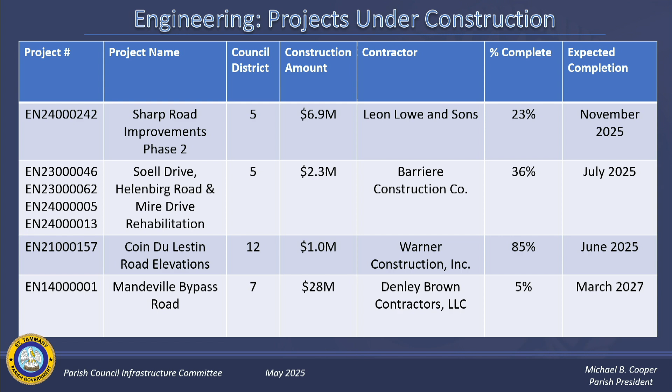The big one on the list, Mandeville Bypass Road - it's a $28 million construction project. They're making their way, clearing through it. As with any project, you hit a little hiccup here and there, sometimes they're a big deal, sometimes they're not. Clearing operations showed some unsuitable soil materials on the front portion of it. It's a small issue for the scale of the project - we're working through it. We also have the connection at US 190 that we're navigating a few things with DOTD on for construction traffic. Again, for the grand scheme of the project, that's small potatoes. If that's the only problems we have to deal with, I'm tickled.

Square 154 drainage - that's on Caroline, Carroll, and Lafitte Streets, in Councilwoman O'Brien's district. Creek construction - this is closing in some ditches along the street and reworking the drainage in this older neighborhood to improve drainage flow. It's 75% complete, and we're expecting that to be wrapped up next month.

The next project is a rehabilitation project for Berry Todd Road and Dixie Ranch Road in Lacombe. Just so you note, it shows 0% complete. Technically this project is under contract - the contract's been let, contracts have been executed, and we're waiting to issue a notice to proceed on it. So it's in that in-between land right now, but as soon as I have a notice to proceed date, everyone will be aware.

Same with Pinnacle Parkway rehabilitation in Councilman Smith's district. I'm glad we're doing this after Costco came in, not before - it's the right time. The pavement's in pretty poor condition in certain locations, and this is going to be rehabbing the entire length of Pinnacle Parkway. If you look when you get off the interstate exit at that location, the asphalt shifts colors - where it shifts colors is the differentiation between state, as part of the interchange, and then us. So that's the best way to determine your eastern extent to it. If you're riding down that road, pay attention, watch when the asphalt changes colors - that's where we're starting, and again this is due to pavement condition out there.

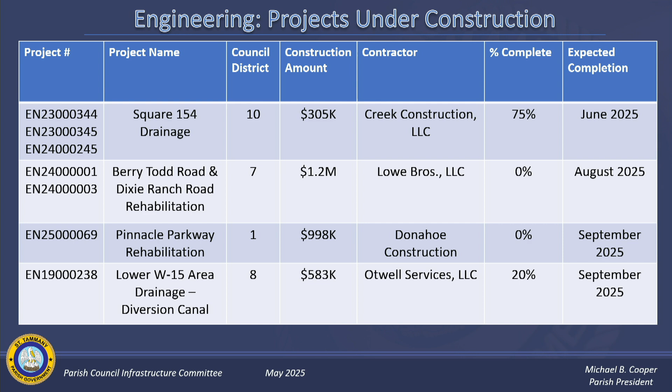Yep, September. And then, me and Engineering and Public Works combined our presentation, so I'm going to turn it over to Jay real quick to go through Public Works projects.

On the Sharp Road, it says 6.9. Is that for phases 1, 2, and 3? No, that's just for phase 2. Okay, thank you. I believe the first phase was at 1.6 million. No, I'm fine, I was just curious what that number was.

Thank you, Daniel. I think the way Daniel has this, we've got projects under construction, so we'll move into Public Works projects under construction, then I'll turn it back over to Daniel, and he'll talk about things that are upcoming, and we've also got some Public Works projects that are upcoming as well.

First on the slideshow list, we have District 7, 9, 12, and 13. I believe we handed out this packet as well for y'all to follow along with. It's got a little bit more additional information, listing the different roads we have in the package and which district those roads are in. The 7, 9, 12, and 13 package was the first asphalt package of the year to go out to bid, and it's about 50% complete right now.

Something to note that we didn't include here, but we can in the future, is that all of our projects have come in under budget right now. If they weren't under budget, we'd be coming back asking for a budget amendment. Back after COVID, that happened to us multiple times with all the price increases. But lately, we've been getting really good prices on a lot of the projects we put out to bid, so we've been under budget, and so far we're on time with all of our projects.

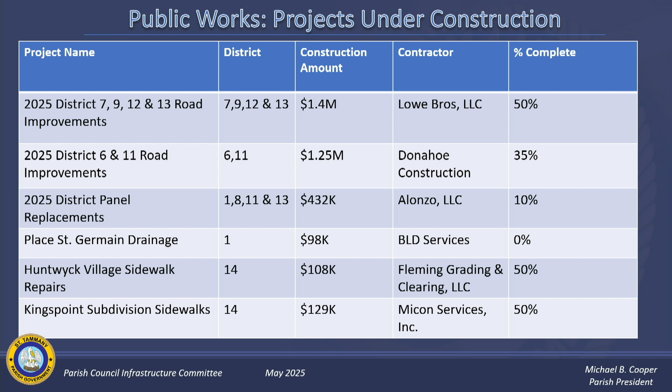Following that, we've got the turning radius improvements in Districts 8, 10, and 14. We're about 20% of the way through. We've been having really good success with turning radius projects in the various districts. We've got a lot of narrow roads that intersect either into collector roads or state highways. Maureen, in your district, we've done a handful going down Highway 59, and in Arthur's district and Joe's we've done some as well. So they've been very well received.

Did you have a question, Councilman Corbin? Yeah, I was just going to ask, for the turning radius project, there's typically an open ditch since we have a lot of those. So you'd extend the culvert and put a softer curve to transition from one road to the next? You have to first extend the culvert, then build something up on top of it, and then put roadway material on it. That's typically correct. If we need a catch basin or an extension of the culvert in order to increase the radius on either side of the side street, it gives more room for vehicles to make that maneuver.

Okay, thank you. And is that, I'm sorry, are those turning radii, the ones that you're building in the future, are those what's incorporated in our UDC today?

I would have to get with Ross and Daniel. I'm not sure if you know - would you mind taking an action to follow up with Ross? Let's make sure that if you're learning things as part of turning radii, that we don't continue to design things the same way. Yep, all right, thank you.

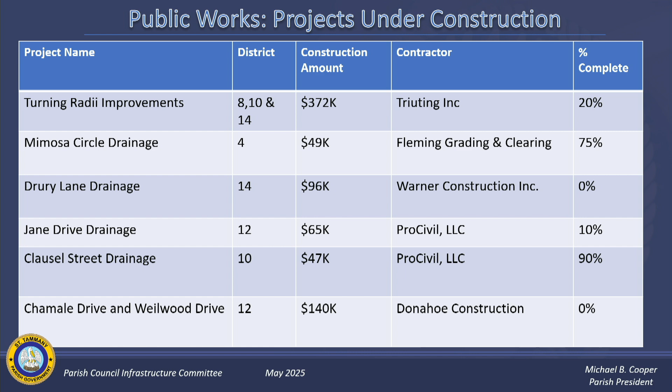And back over to Daniel. All right, so this is what I always look forward to - the projects that are coming up next.

First, we have Harrison Avenue rehabilitation. Anybody that's driven down Harrison Avenue knows it's in need of rehabilitation. Yes, very much so - the drought did us a number. What was that, two years ago, drying out the ditches along the side of the road, settling out the road really well, making a nice crack down the entire length of it with settlement. But this is a big one - I'd consider this phase one only. This is from Abita Ridge subdivision to Highway 59. The first leg from Abita Ridge to US 190 is running as a separate project that includes widening, some turning improvements, and intersection improvements at Falconer Boulevard.

So for the general public, I would ask to bear with us - we're going to get a portion done, and a portion's going to remain undone until we get the other project moving through, which we're expecting sometime next year. So this is a two-phase project? Two-phase, yes, just two. Okay, thank you.

Here's one - it's not a road or drainage project, but I included this on here for Councilman Corbin and Councilman Bender because they're always asking me questions about it: the St. Tammany Parish Fishing Pier. The project design is complete. We have submitted all our documents to procurement, and they're processing the paperwork now, so it will go out to bid in the next couple of weeks. As soon as I get an advertisement date for when it's hitting the newspaper, I will let everybody know. But we're moving forward with the project.

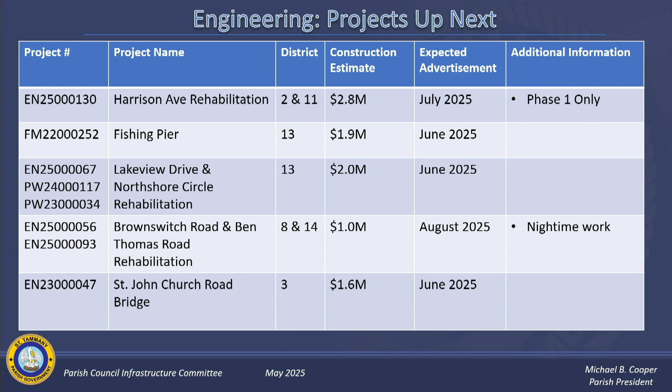Yes, well, as you know, on Brownswitch Road, they're also putting a hotel right next to Frdella's too. Oh, really? That's going to be another, I think, 70 or 80 room hotel. By the Waffle House? Right between Waffle House, Frdella's, and the Waffle House, so that's going to increase traffic there too as well.

Another project we have is a bridge replacement project, St. John Church Road Bridge, in Councilwoman Casabon's district. This project, and when I go to the next slide, I would always tell everybody the three big hangups I always have on capital projects in the Department of Engineering are DOTD approvals, environmental approvals, and right-of-way.

If we got a magic project, which I guess Public Works gets pretty often compared to me, if you involve any of those, you might as well add a year to the project for each of them, maybe a little more. So St. John Church Road's been ready for construction for about 5 months now, and we're just getting our right-of-way cleared and putting it out to bid.

So going to the next list, every one of these projects are ready to go. We have budgeted funds for them. We're not expecting any additional funding need. The only thing we're waiting for is right-of-way to clear through our processes.

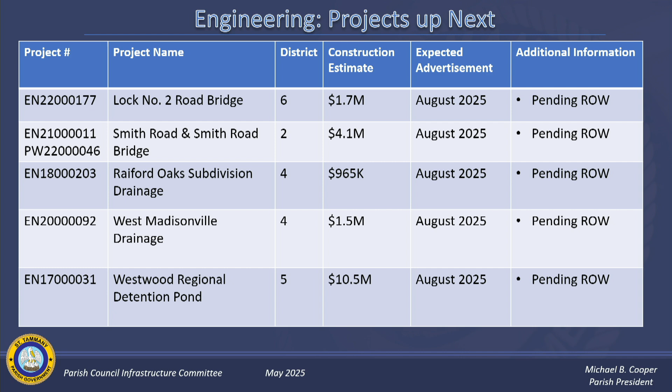Westwood Regional Detention Pond Project - the project is designed, ready to go, shows substantial improvements to the Tall Timbers area, which is in Councilman Phillips' district. The project's ready to go. The land is titled to the Archdiocese of New Orleans. They're in bankruptcy, so it has kind of drawn out our land acquisition, but we're seeing light at the end of the tunnel on this one, hoping that that'll clear and then we'll go to construction. All right, thanks, Daniel.

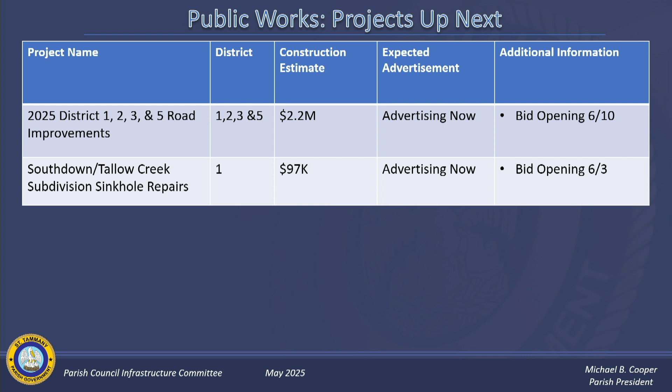Is there any chance because of the court case the diocese is going through that they renege on the land donation? Not as far as I'm aware. The legal department's been actively going back and forth with them on getting the agreement in place.

Can I ask one other question about District 5? Where do we go, how do we pursue, for example, in Councilwoman Siden's district and District 5, the service roads there by Judge Tanner, and then we pulled money from that roundabout that was going to go in there. So when would that money come back in, and how do we pursue getting the state to fix all those service roads and the crossover? So I guess the service roads are property of the state, so that would be getting it programmed into the state for rehabilitation.

Is there an effort right now? I mean, the roads are falling apart, that's why I'm asking. No, I have not made an ask of them for it, but I'd gladly put in one. I guess we could say good luck, but it's nice to at least get it on the list. Okay, and then that roundabout money, when does that come? We have to do a study again, you said before, yes right? That was one the council had wanted us to relook at the traffic, and that's underway. Okay, thank you.

So we have only 2 projects here, and they really probably could have been combined in the earlier slide. It's the 1, 2, 3, and 5 asphalt package, and it opens June 10th, so in like 2 weeks. We try to just stagger it so we don't advertise and have all the asphalt packages go out to bid at the same time. So this is just the last one of the asphalt packages that we're putting out. And then Southdown, Tallow Creek subdivision sinkhole repairs is a drainage sinkhole repair project in Councilman Smith's district.

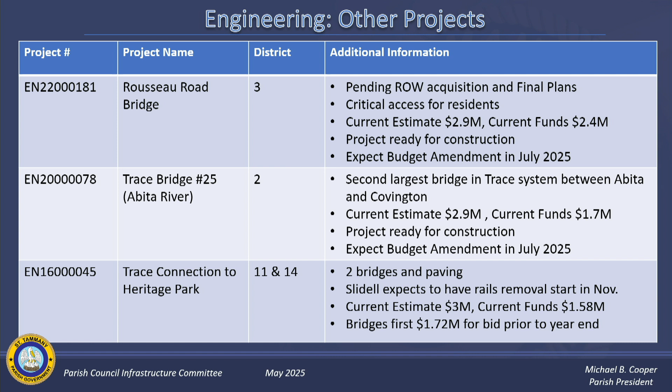Just so the members of the committee know, there's a subset of us that actually meet with the city of Slidell on a bi-monthly basis to status this project, and have been for probably 6 months now, and we'll continue until completion. The part they're responsible for is the rails, and they're wrapping that up. There was a notional schedule they provided yesterday for the project. This would finally get the trail connected all the way into Heritage Park when finished, so we'll be able to go from Heritage Park all the way to Covington.

All right, that's it. Are there any questions for anybody else? Councilman Bender, where are you at? There. Other one, to your left. Microphone to your left. Daniel, on this - and it's not because you left out my district, but my district is part of this as well.

When you hit Gause Boulevard and that straight shot down towards Heritage Park, and Heritage Park itself is in my district - my question is not because you left it out, but do these funds take it all the way to Heritage Park? So it takes it to Carnation Street, where the city of Slidell picks it up and carries it to Heritage Park. Okay, great, that's what I wanted to know. Thank you.

So we're going to start with the water sector project we did for Phase 2. This is Councilman Seiden's district, Councilman Smith's district, and Councilman Kazaman's district - it touches all of those. This is an effort to remove 9 wastewater treatment plants along Brewster Road to improve the water quality in the watershed area along the west end of Brewster, as well as increase the efficiency of utility operations. The first thing we did was model it - we had a consultant test all the lift stations, look at the different collection systems, and come up with the correct wet well sizes as well as pump sizes to tie everything together. It's all being routed to the West St. Tammany Regional Wastewater Treatment Plant on the north side of 1085, just west of the 1077 roundabout with Bootlegger Road.

What's the color coding mean on that? The green versus the red - let's see.

So green is the existing collection system for West St. Tammany, and purple is the new system we're adding. When we linked the model into it, we had the existing green system, and part of the modeler's task was to add the purple system, a different collection system, to the overall West St. Tammany system. That was the new improvements being added to that system, so the final model shows the entire system.

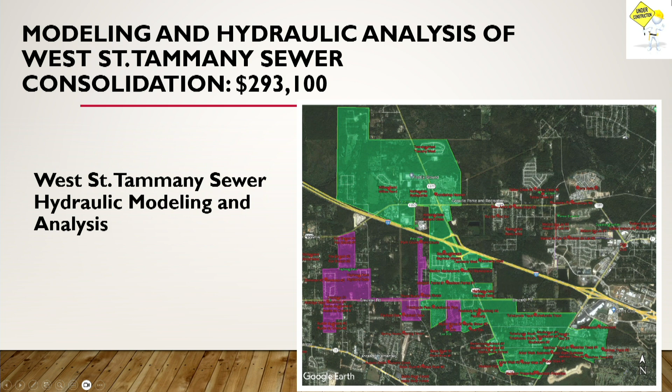So we took the model information and designed multiple projects in order to do all this. All the water sector stuff had to be designed in a tight time frame to meet all the budget and funding requirements for the grants associated with it. So we broke the projects into pieces large enough to make the engineering design worthwhile, but small enough to be done and designed in a timely manner.

Les Bois was one of the first ones we did. This is an individual wastewater treatment plant at this subdivision, and it's probably close to 90% complete. We're going through testing right now with the pumps and tie-ins, and it'll be waiting on a couple of the other projects in order to wrap up. We've been working with the residents in this subdivision - we had a couple air release valves installed in some front yards, so we met with them to dress those up as best as possible.

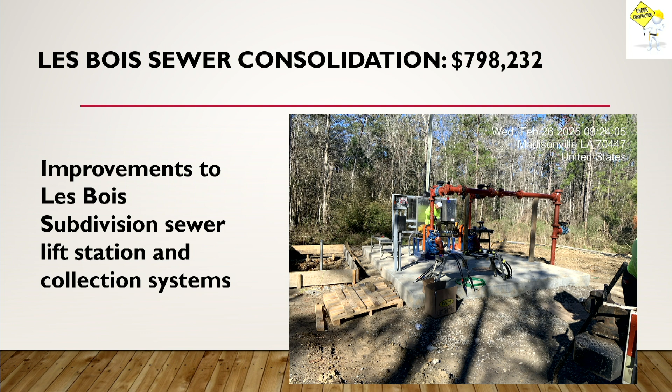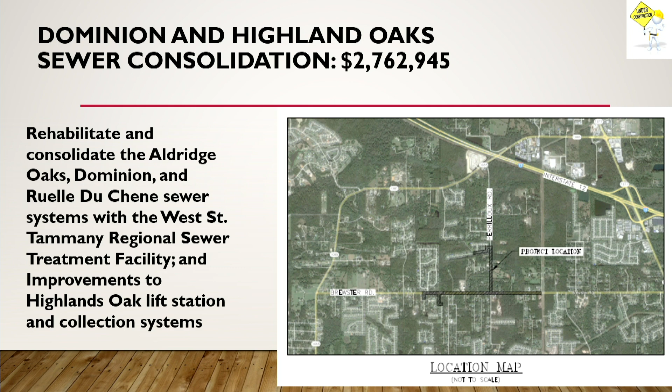Next one is Dominion and Highland Oaks. This one's moving forward - I believe they're getting ready to start clearing some of the sites. I know they've cleared some of Ruelle, which is also included in this. We've been working with the HOAs on the clearing and access. This one's been out to bid, it's under contract, notice to proceed has been issued, but the contractor just hasn't mobilized to the site yet. So this is 0%? This would be 0%. Thanks.

I'm sorry, on your first one on the analysis, what percent complete are you at? The model's complete - the first two tasks of the model are complete, the third task is not. That third task is a post-calibration once everything's done. Once everything is complete and online, we'll go back through, pull flows, pull pressures, check the meters, and make sure the model is calibrated to the actual system itself, so we can use it for planning out future improvements.

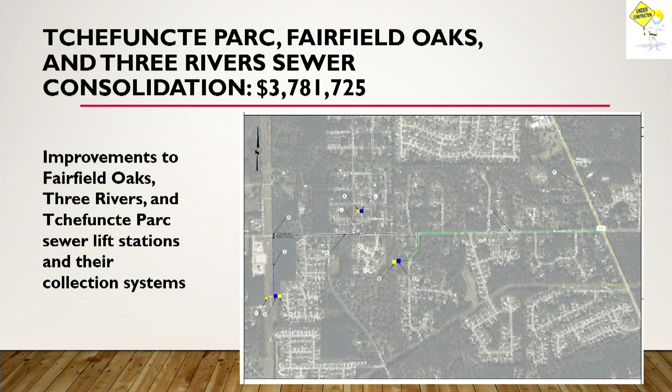What level of redundancy do you have there? Every one of these lift stations is going to have backup generators. This has got backup generators as well as a bypass and oversized wet well. We left the existing wet well to expand it, that way we can bypass pump out of one of the other wet wells. So there's a lot of redundancy associated with this.

On the Tchefuncte Parc one, what percent is that complete? Tchefuncte Parc, they just mobilized to it. 0%, okay, thank you.

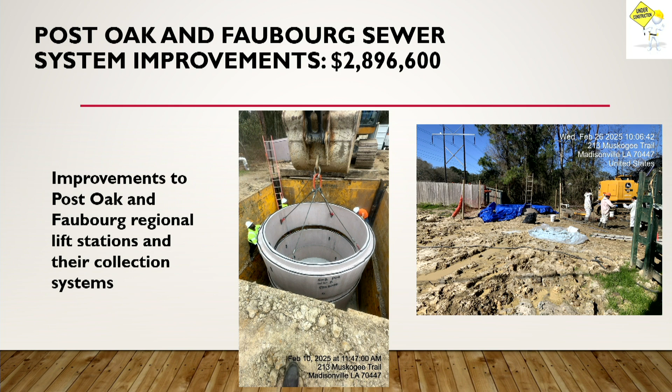Hey Chris, all these have to be done by the end of 2026? Yes, sir. Okay, so at least that gives a time frame for the members of the committee to understand when they're going to be complete. Correct. And right now the schedule's for everything to be completed first quarter 26.

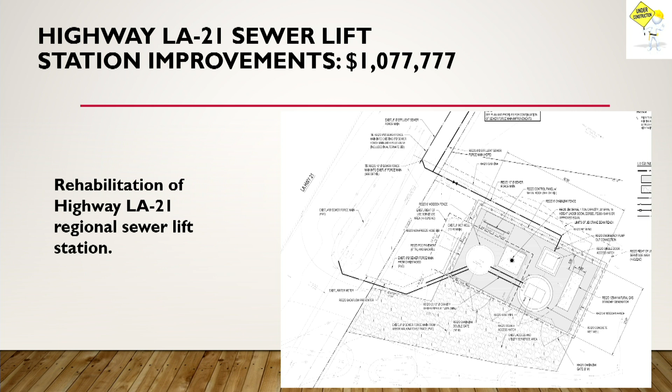So this is like a detention pond, essentially? It's not a detention pond, but it's a holding space to take that, more of a processing space, not necessarily a holding space. So everything's going to dump in here, it'll run through mechanical screens where we'll pull solids, pieces of plastic, feminine hygiene products, rags, whatever, out and separate them. Put them into, compress them, and dump them into a dumpster to be hauled off and allow just the water to be pumped and pass through.

So we've got the mechanical screens here of one sieve size, and then when they go to the headworks going into the plant, there's another set of mechanical screens that is much smaller sieve size to eliminate the additional stuff going in there. Thanks, Chris. This one's probably 30% complete. The wet well's been poured. They just finished pouring the false floor, false bottom, it's going to be the top of the wet well, bottom floor of the building.

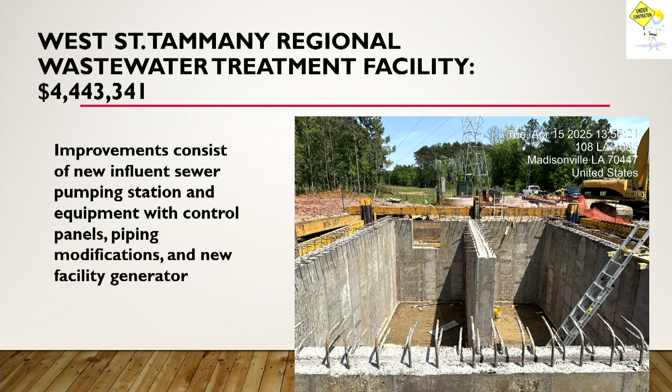So those are the projects on the west end of the parish for the sewer. I'm going to jump to the east side now.

So in essence, Crossgates currently has 3 plants that are about 40 to 50 years old, and this project will consolidate them all into one plant, eliminating the other two plants afterward. We're going to use the footprint of plant 1, behind the building, to construct a larger, taller plant to hold more flow. Right now the current flow at this plant is 900,000 gallons a day, and the new plant will handle 1 million gallons per day. It's pretty much maxed out for the allowable footprint we can use. Once the 1 million gallon plant is in place, the end of this contract is to demo the rest of the 2 plants still there and clean the site up, so in the future we'll be able to do a future expansion if needed. It'll be a clean site to start from.

Right, you could add additional capacity at that point in time. Correct, but it's not currently in scope to what we're working on. The scope right now just includes demoing the rest of the site and cleaning it up.

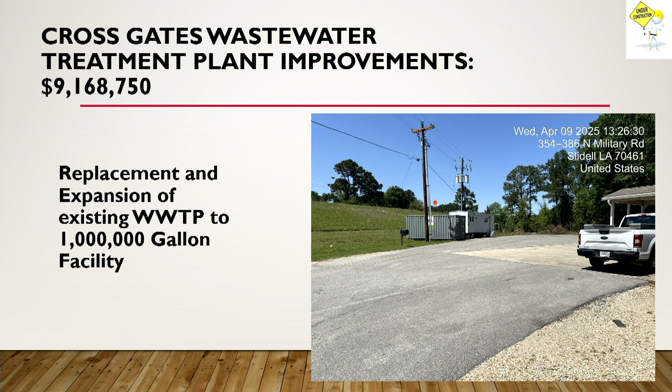One of the things I've heard about, I think in a meeting with Tim Brown, is the ability to empty trucks when they go clean out a private or individual wastewater treatment system. Is this the location that will do that, and will there be capacity to support those trucks going forward, or will that be at both ends of the parish? This right now is the only permitted septic receiving station in St. Tammany Parish. We receive septic haulers, and when they pump out individual sewer treatment systems, they'll come and dump here. We're in the process of trying to set up to where we can continue that through construction, but once construction is complete, they'll have an area specifically designated for septic reception.

It's like South Terrebonne and a couple of the parishes we've looked at that do this. It's a whole system. You come up, hook the truck up, swipe a card, and can do it any time of day or night, and pump out. It's got grit removal, a couple of screens, a hot water wash down that separates the grease and fats, and then allows the rest of the water to go to the plant.

So you'll be maintaining that capability. Correct, it'll also allow us to improve our treatment capabilities at Crossgates, because a lot of times exceedances on the discharge monitoring reports are based on getting a heavy load from one of the septic haulers. If somebody dumps something like porta potty water, it'll shock load the plant and cause a disturbance in our treatment capabilities. So this will help even that out a little bit. Yes, sir.

And what percent complete is that? We're at the beginning of this. The contractor's mobilizing, putting the electric in place, and doing prep work on the site.

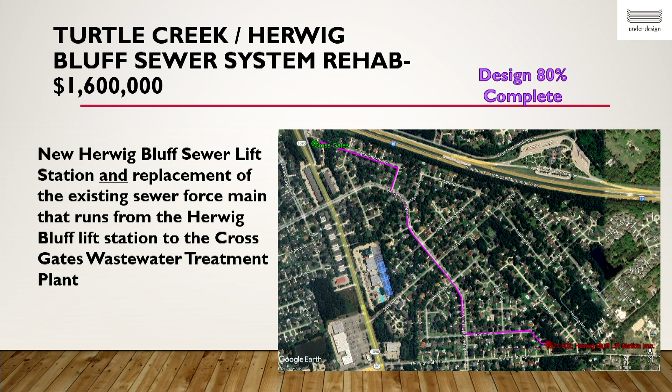For the most part, everybody puts new lines in. We're going to use the existing line, and we're going to blow it out and pull a bigger line through it, due to all the existing utilities in that area and the subsurface drainage. So you're essentially doing replacement in situ while maintaining flow, since there's nowhere else for it to go. Correct, it's going to be sequenced as part of putting the two projects together. The contractor doing the lift station is responsible for the lift station and controls, and can time out when they do the different segments of line as they replace it.

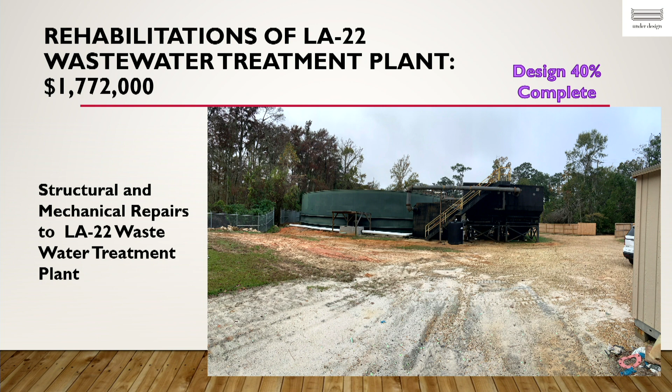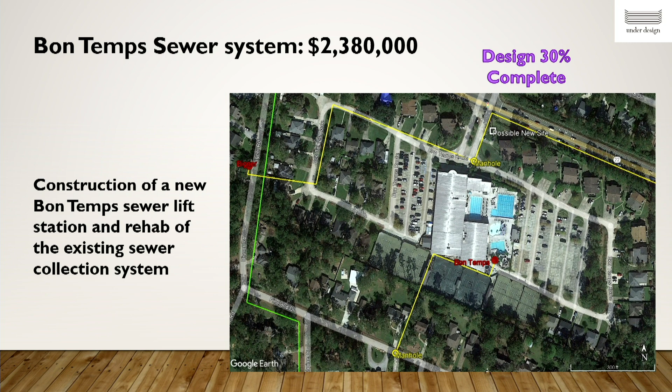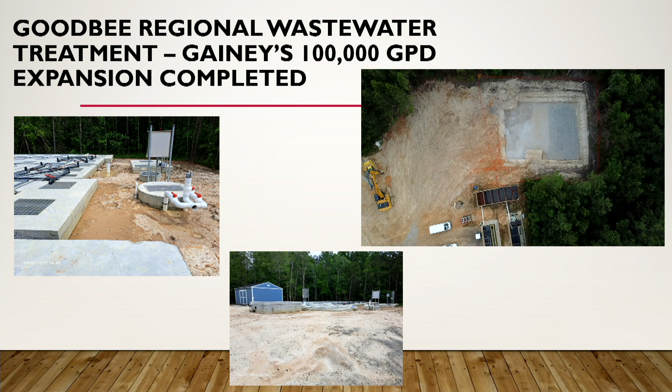At the same site, we've come to you guys with a loan request that we're in the process of scheduling the closing of for $7 million. That's to provide a regional plant in place here. The previous 100,000 gallons we're just finishing construction on will be added as a supplement to the existing plant and used to get enough flow as well as maintain treatment while the plant's under construction. This is about 80% completely designed right now.

And this is one we're hoping to wrap up also this summer and go out to bid by the end of the year. But again, as Daniel can attest, we've been hung up with the Corps of Engineers as far as getting a determination and getting it through. That's been a long time closing issue with the loan as well as wrapping up the plans. I'd like to give you a timeframe on where this one's going to go to bid, but ultimately it's hung up in the Corps right now, and until we get an answer or response from them on how to move this forward, we're kind of stuck.

So is that flowing from bottom to top or top to bottom? From top to bottom. Thank you.

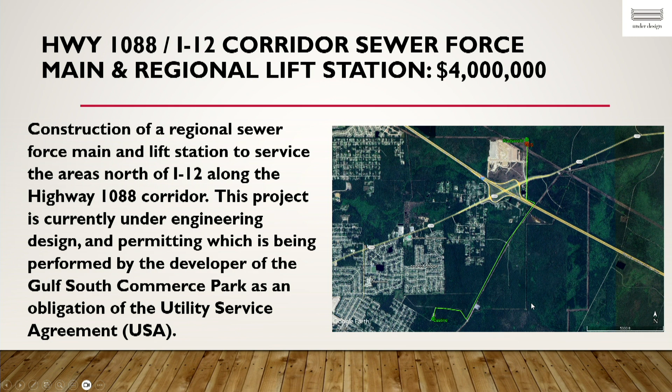Where is that at exactly? It's on Highway 59. You make a right or turn east onto Hoffman Road, and then before you get to Autumn Wind, you go over the trace, and then it's the next road on the left, tucked back in the trees. It's behind some homes that you can't see. You're not able to see it from the road.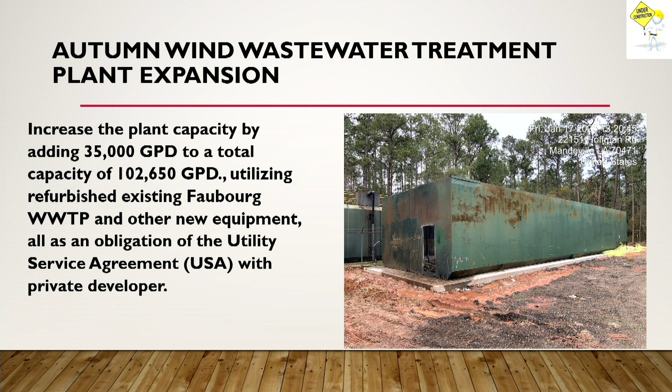So before I move into the water project, any questions on sewer projects? Sounds like we're rebuilding sewers across the whole parish. Yes sir, we're pretty evenly distributed — about 50% on the west and 50% on the east. For water, we're probably 60 to 70% on the east and about 30% on the west.

All right, so I'll go a little quicker here through these. So Alton, this project is grant funded. This is an interconnect with the Ashton Parc system on Haas Road to Alton to provide a secondary source for the Alton water system.

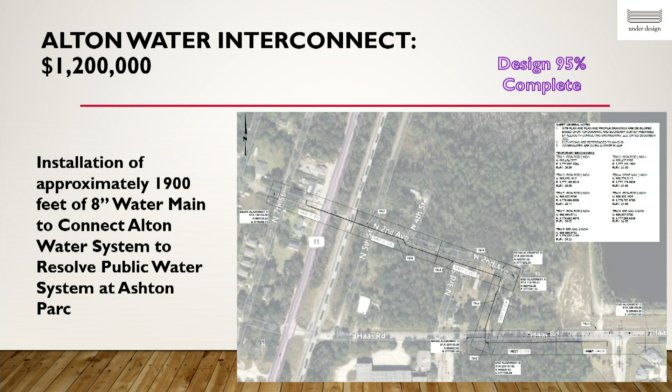We're going to revise the design a little bit. We got some new information to where we can save a significant amount of money on construction with a small tweak in the design, and so we're going to be doing that this summer. This should also wrap up this fall to where we can look at going to bid. We've got construction funding for this set aside. It's just a matter of closing out the design on it and getting it submitted to LDH for permit.

Safe Haven, this project is running behind right now from the water well, but that's been due to unforeseen issues we've encountered throughout the project. But we're at the last phase of this. It's 90% complete, and we've got one last change order we're in the process of moving forward with, and that'll allow us to close this project out in the next month or two.

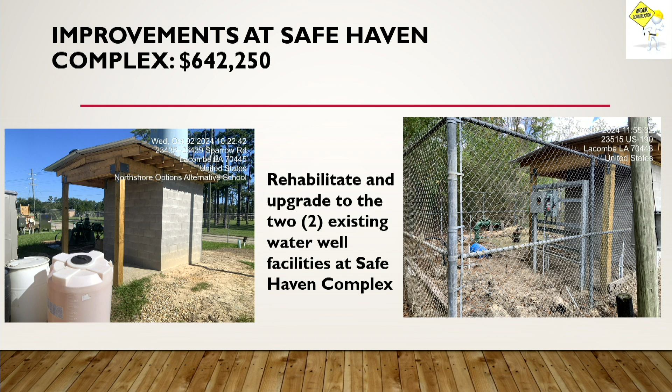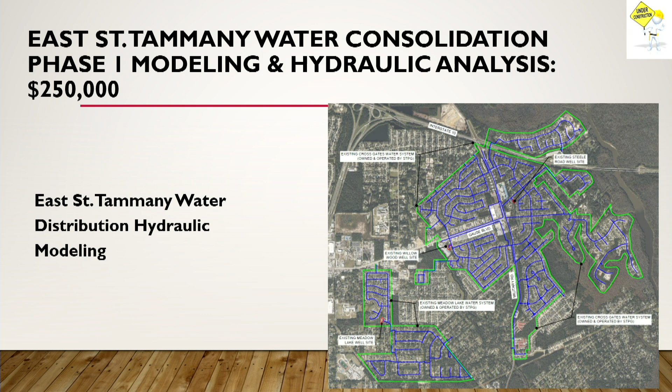Moving to the Cross Gates water system, we've got the East St. Tammany phase one, this Cross Gates proper. We did a model for this one. It included the consolidation of Meadow Lake, as well as several of the mobile home parks in the area. Next slide is phase two, where we did the model for that to expand it to incorporate the additional areas that we're tying in and consolidating into the Cross Gates water system.

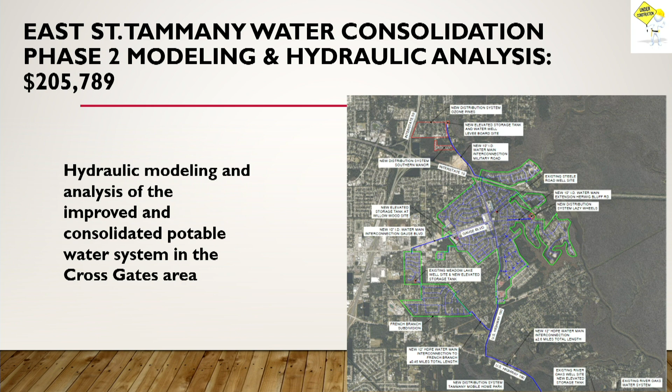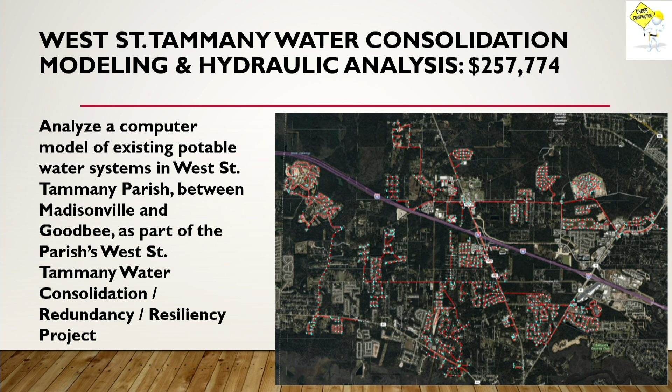Using the model information, we were able to revise our initial estimates that we submit to water sector in order to bring our projects back within budget due to the time frames and the scopes, without having to make any scope changes, but simply changing the sizes of the water towers and the types.

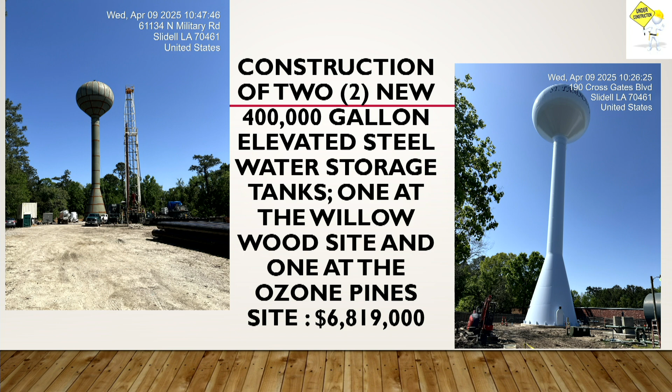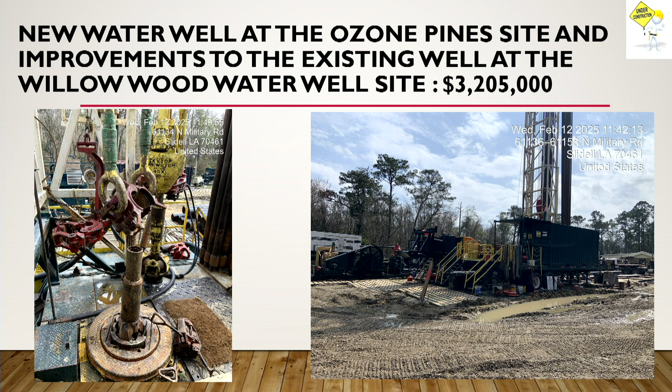So right now we've got two elevated towers in the Slidell area and the Cross Gates proper area under construction. The Willow Wood Tower is about 95%. It's been coated and named, and at this point we're working on the piping at the bottom. The Willow Wood, or the Ozone Pines Tower, that one's erected. It's currently being coated. It's also got the water well going on site right now that they're drilling. The work has been done with the well, the aquifer has been selected, and we're waiting on the steel casing to come in so we can move forward with that. So we're in a several month lull in construction of the water well as we wait for the steel to come in before it can be set.

Following the well construction going in, we're going to have disinfection buildings being constructed at each of these sites. They're going to be CMU block wall, real permanent buildings, all designed based off the latest building codes as well as for flood elevations. They're going to provide us the ability to use multiple types of disinfection for the water. At this time, none of the buildings have started — these will be the last things that start on the site.

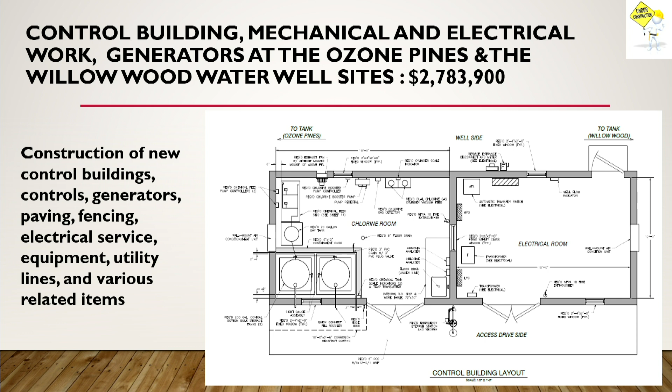The Ozone Pines interconnection is probably about 70% complete. Some of these interconnections are already online. Ozone is not online at all yet, these are all being pressure tested where they're in. They still have connections to make at some of the intersections in the Ozone Pines subdivision, and back to the Cross Gates system. But the majority of the line has been installed.

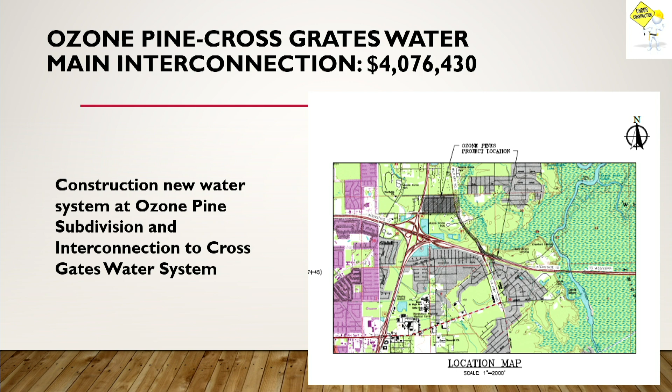Lazy Wheels and Southern Manor Mobile Home Parks are both under construction right now. Lazy Wheels is probably close to 90%, and Southern Manor is probably around 70%. These are in Slidell on Military Road. Lazy Wheels is actually up off Herwood Bluff Road, and Southern Manor's on the west side of Military between Brown Switch and the Military Ridge subdivision.

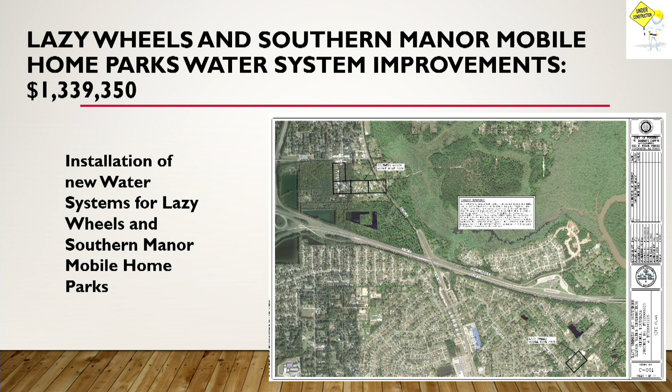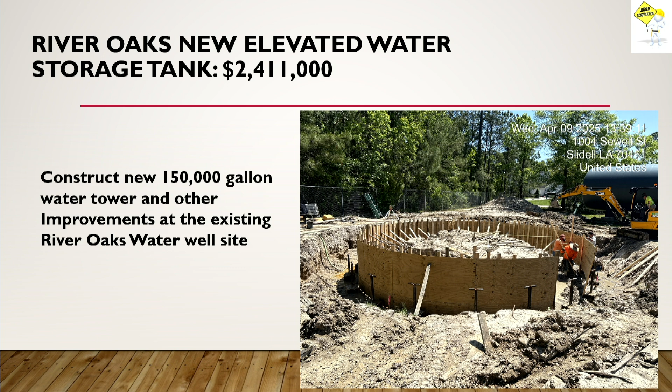One of the phase 2 projects for the water sector is River Oaks. We're overhauling this site as well. Currently the elevated tower is being constructed, and we're waiting on a steel crew now to come in. The foundation work's all done, the erection steel's been ordered, and the erection crew is scheduled to come on site in the October-November time frame. So as opposed to letting this time go to waste, we've had the building contractor move up his time frame to come in and start erecting the building.

So the building's foundation work should start beginning of June. The River Oaks building, this one's going to actually be an elevated structure due to the flood zone in the area. Part of the scope is also elevating the well casing and changing out the pump at the well.

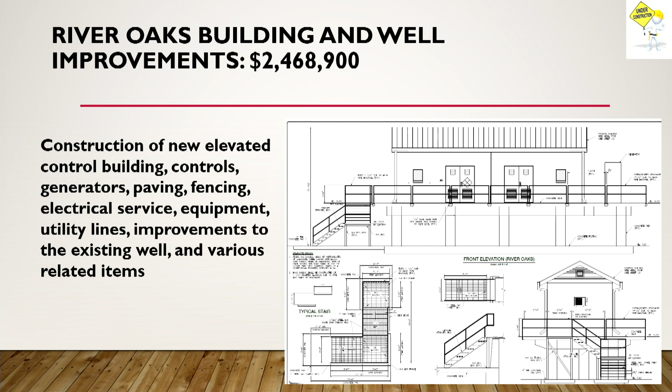As we move from site to site, another one of the sites included in phase 2 is Meadow Lake. This site's being completely overhauled on the water side. It's going to have a new disinfection building, a new pump, and it's also going to get an above ground storage tank in lieu of an elevated storage tank. Due to the cost as well as the amount of water that would be provided, we wouldn't be able to turn it over in time or optimize the ability to provide fresh water and maintain a capacity for fire flows.

And future development, we elected to go with an above ground storage tank at this site. This one is getting ready to get started. The contractor's on site, and they're all working on bringing power to the site.

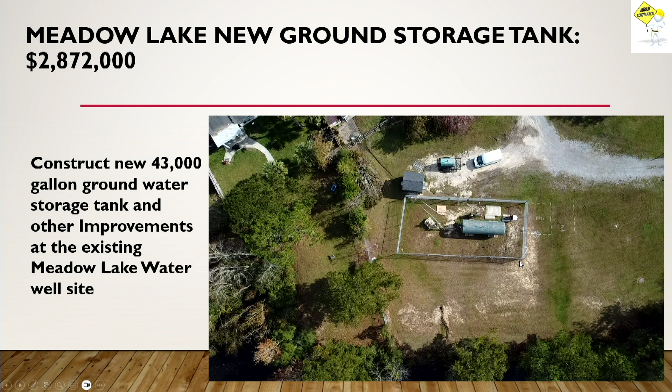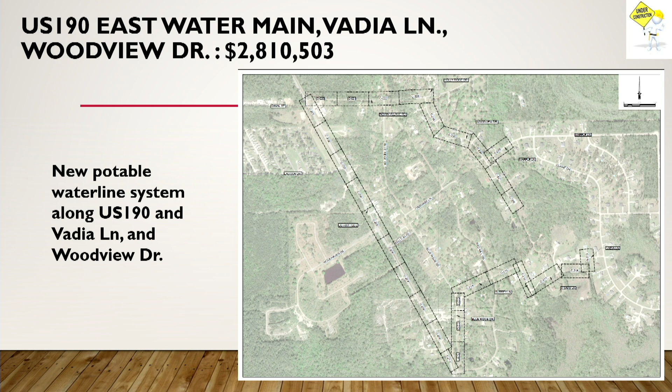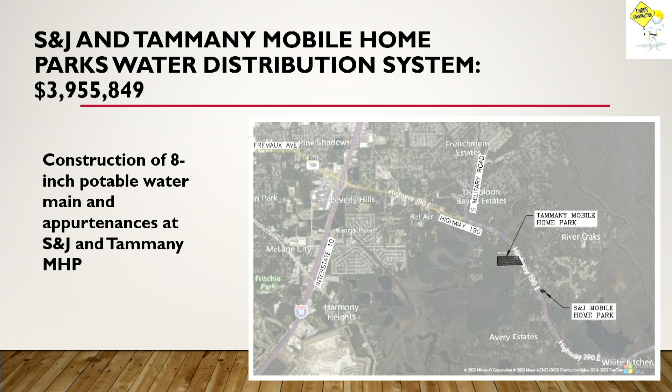This project's 80% complete. The water line is all in, and we're working on the fire hydrants and some of the tie-ins around it.

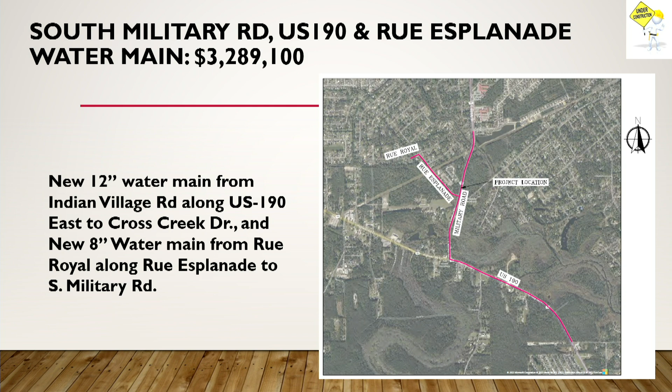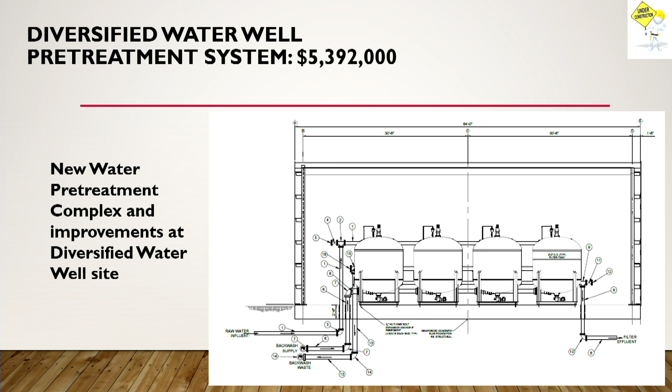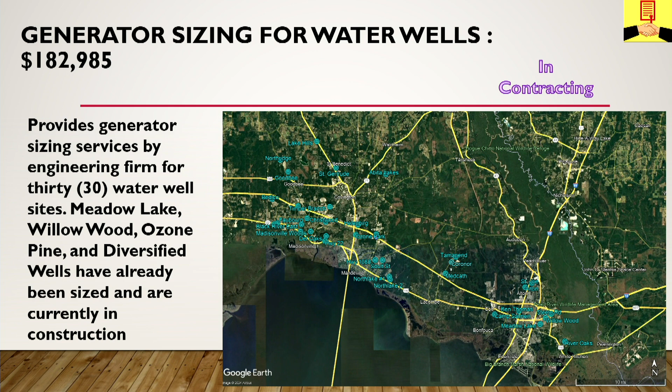The last item coming up is we're in the process of getting an electrical engineer under contract to go through and provide evaluations at each of our well sites, providing correct generator sizing and plans and specs. This will give us a playbook to go site to site to seek funding for installation of generators with the correct size, as well as note any other electrical deficiencies or items that need to be corrected to improve the well sites.

I can go into a lot more detail if y'all want, if you have any other questions. Let's see what questions people have.

As far as Westwood, that facility there, any updates? How are things going? We just completed startup of all but one blower. All the new blowers we've ordered have been installed and are online. We've got one last one we're changing out, and we're waiting for the manufacturer and the equipment rep to come out and do the startup with us.

Are you getting any kind of favorable response from the neighborhood given all the work you've been doing over there? I believe so. At this point they can hear the water swishing rather than the hum of equipment, but we're going to have to do the best we can. I can't really control the water swishing sound.